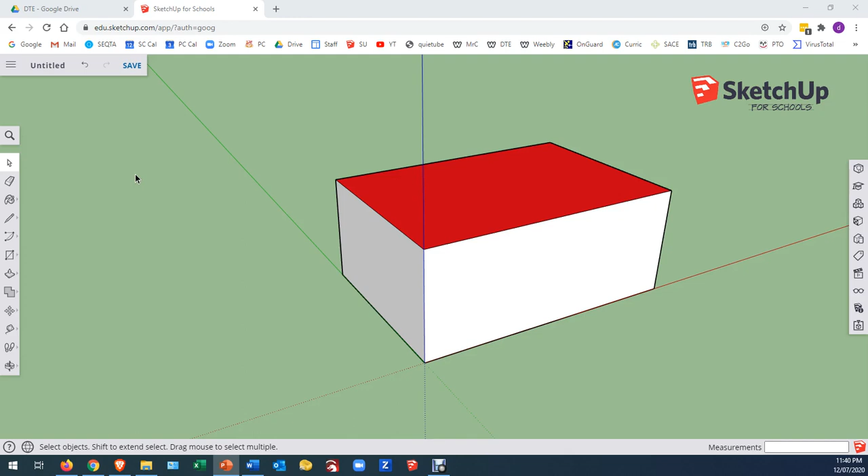Please pay attention because I'm going to ask you to pause and do this in a minute. We're going to come to the main menu, click on Home, create new, and create Simple Template Millimeters. I have an old model here, so it's going to ask if I want to save changes. I'm going to say no. Please pause your video and do those steps: main menu, Home, New, Simple Template Millimeters. Don't save your previous model. Please do that now.

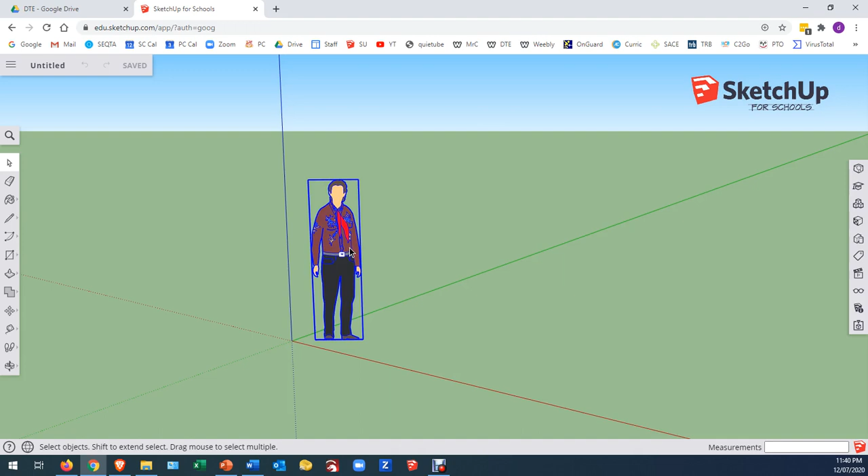Now we're going to get rid of this little person here. First we delete him. We don't need him, but he's actually in the model as a component, so we come to the Components menu. Nothing is visible here, but he's in the model itself, so we click on the house, and then click these three arrows to purge. That will clear your model of any components not actively on your workspace. Please pause this video: delete the object, Components, house, purge. Please pause and do that now.

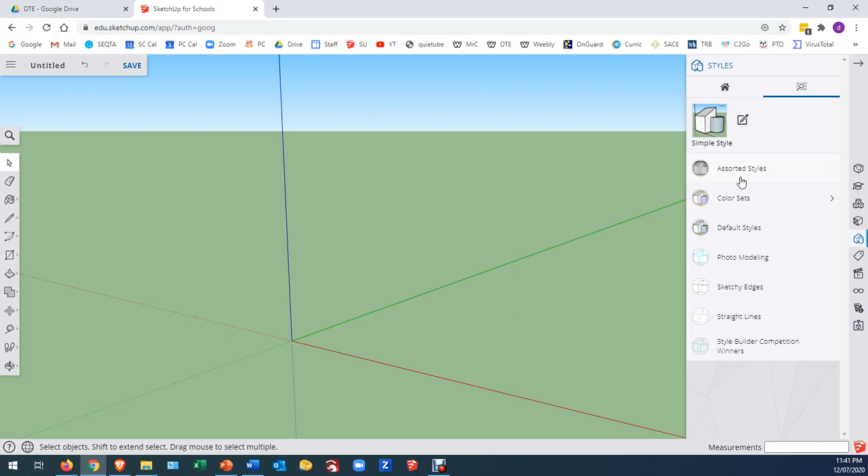Next we're going to set our environment. We have the green landscape and blue sky, and we want to get rid of that. We come over here to Styles, which are standard ways of setting the background, the colors we use, and everything else. We have this little arrow, or magnifying glass, for browse. That's fine. We're going to click here on Default Styles.

There are two styles useful to us. I use this one called Shaded, and that's what I suggest you click - it's very good for modeling. Sometimes, however, if I'm producing printed documents, the outline needs to be a little darker, or I need to separate my dimensions from the object, in which case I might select Construction Documentation style. That's up to you, just remember the option is there. Also, sometimes you'll want to see the inside of your shape - you'll come here and use X-ray - but right now we're going to select the Shaded style.

Please pause the video and do that again. Remember, from where we were, we came here and clicked on Styles. We didn't need to click anything here - we simply went to Default Styles and clicked on Shaded. Please pause the video and do that now.

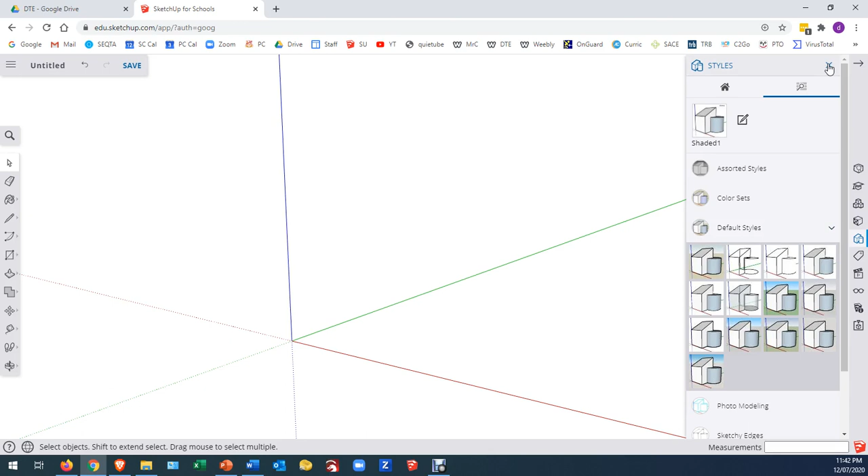We're going to skip over a step and come back. We come down here to Model Information and open up this panel. First, we need to set the length units - make sure it's on 0.0 millimeters. We need to be on millimeters, and we should be, since we started with that template in millimeters, so that should be fine.

The next one we need to click is precision - we click on 0, without any decimal places. Please make sure this tick is selected, and make sure the snap interval is 1 millimeter. So as a refresher: Model Information, 0.0 millimeters, 0, tick, 1 millimeter. Please pause the video and do that now.

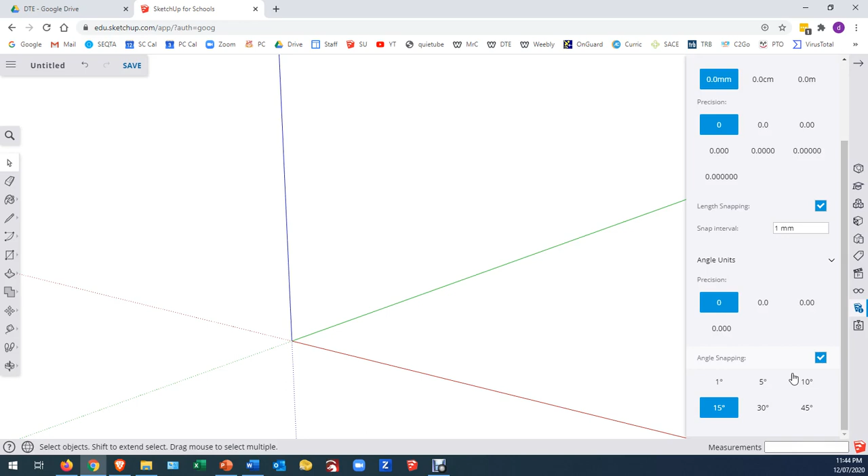Right, the next thing we're going to be looking at is the angle unit. So we're going to firstly click on this little arrow here, and we're going to scroll down. I've used my scroll wheel, but you can drag the bar this way. Once again, for precision, we do not need to show fractions of an angle, so we're going to click on 0. We're going to click the tick to say that we do want angle snapping, and 15 degrees is adequate.

Please pause the video once we've done this. So remember, show the angle units, 0, tick, 15 degrees. Please pause your video, go to your drawing, your model, and do that now.

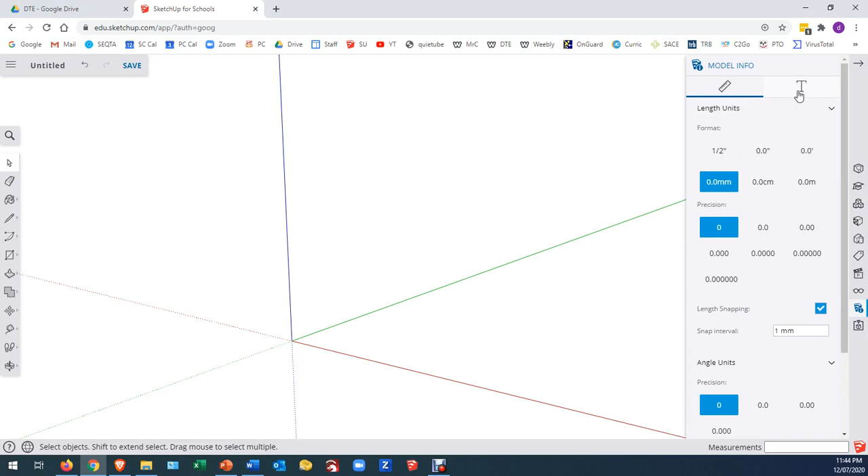Okay, from here we're going to scroll back up, and we're going to click on this letter T for text, and this allows us to set some styles for the dimensions that we're going to be putting on the drawing. I find that they need to stand out a little bit better, so the font of Open Sans is fine, but I'd like you to click on bold. I'd like you to make that 14, and the align to the dimensions is going to be fine.

This is on the screen, and that means that no matter which way you organize it, it's going to show up and be visible to you, so we're going to keep that selected. And I find that it's a little bit clearer if we click on this one here that says slash. We do not have any dimensions up here, so we do not need to click on the button that says update all dimensions, but if you were to make these changes when there were already dimensions on your drawing, you would go ahead and do that then.

But for now, let's repeat the instructions before you go do it. Click on the T, make that bold, 14, leave this as it is, click on slash. Please pause the video and go do that now.

Okay, I'm going to close that. Now what I'm going to do is I'm going to draw a little cube here. I'm going to do that by selecting my rectangle tool. So I'm clicking here, rectangle. I'm going to click once on the origin. I'm going to drag, I'm going to click. Now before I move, touch, do anything else, all I'm going to do is type 500, 500.

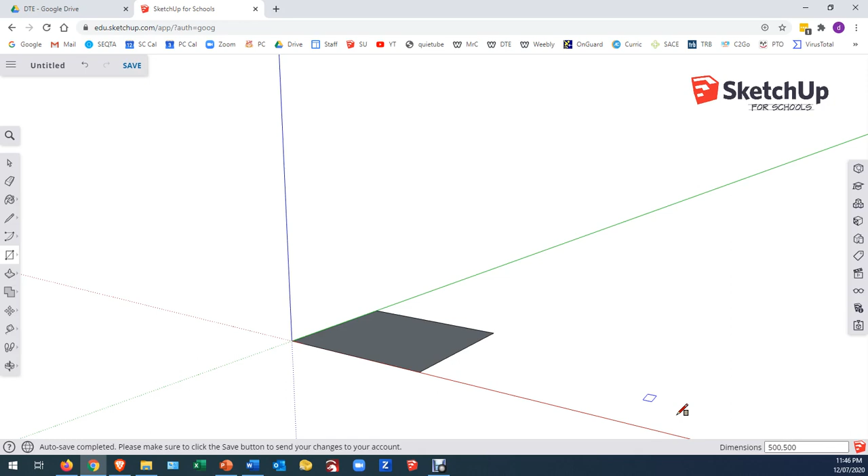You'll notice I did not move my cursor into the dimensions bar, but the dimensions are changing down the bottom here. So there they are. I haven't clicked, I haven't done anything. I've typed the numbers in. Now I'm going to press enter, and you'll see that it resizes that rectangle.

So a reminder, click here, click your rectangle tool, click once, click twice, type 500, 500 without moving the cursor. Do not click in that box. Hit enter, and you'll get a rectangle. Please pause the video and do that now.

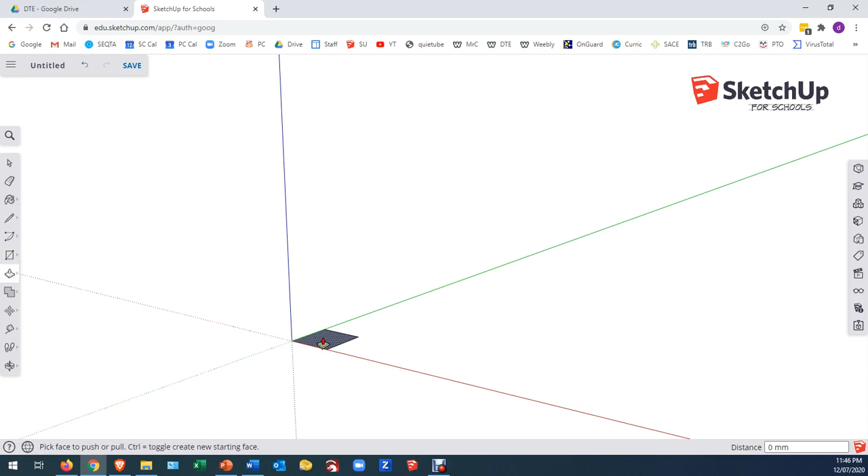Okay, the next thing that we're going to do is we're going to come back here to the push-pull tool. We're going to make sure we select push-pull. We're going to hover over that surface. We're going to pull up and let go. So we're going to drag it up. I'm now just going to type 500. I haven't moved my mouse. I haven't clicked into the measurements box or anything like that. I'm just going to click enter, and that creates a cube.

So reminder, push-pull, click and drag, release it, 500, enter. Please pause the video and do that now.

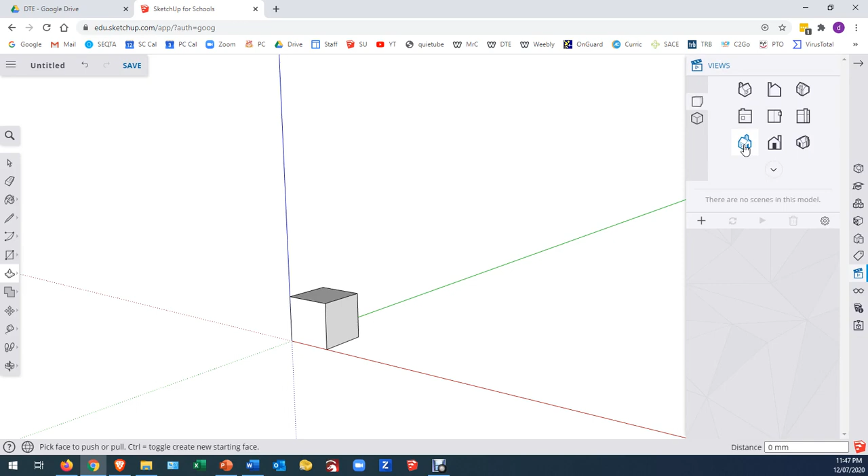Alright, so now what we're going to do is we're going to come back to this views menu here, and we're going to open this up, and I'm going to click on this one in the bottom left corner. That's going to give me my orientation the way I want it. But I can close the views menu off. You can see that this doesn't take up much space in my screen.

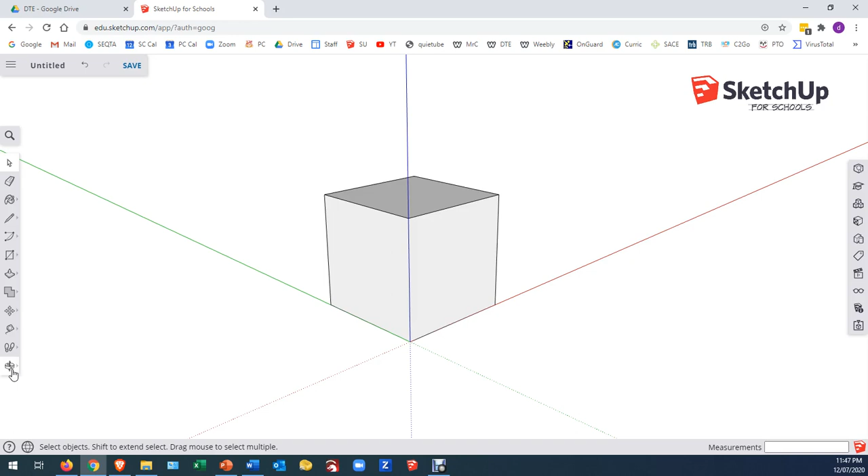I'm going to zoom it to where I'm comfortable, and this just means that when I draw something, and most of our items will be less than 500 millimeters, I will be able to see it. It won't be zoomed out tremendously. So I've just done this. I'm using my scroll wheel to zoom in, but otherwise what you're going to need to do is use your zoom button, or you can use zoom extents, but that's a little bit too close.

So you'll need to zoom and then zoom back out a little bit to something looking like that. So please, as a reminder of the steps, we're going to use the views window, views panel. We're going to click on this button here. Then we're going to zoom till it's actually a comfortable size on the screen. Please pause the video and do that now.

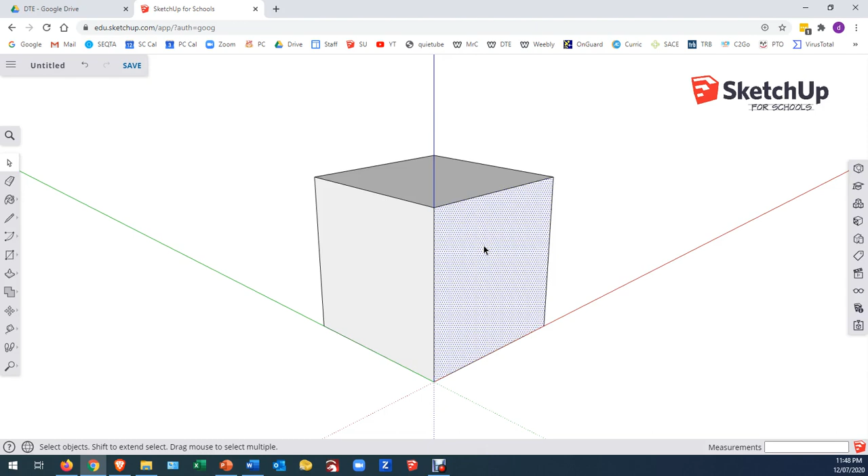Okay, we don't actually need this shape on our blank document, so I'm going to select the whole thing, which I've triple clicked. I'm going to hit my delete key so it goes away, and all that remains is to save it. Now, because this is untitled, I should be able to hit save and it'll ask me for a name. Otherwise, a better way of doing this and a habit to get into is to come to your main menu and click save as.

So we have untitled. I'm going to double click and type in blank. That is my name. I'm going to say OK. It's going to ask me where to put it. Now this goes back to Google Drive, and in the very first video we set up the Google Drive. So we're going to go firstly into the folder for 2020, or whatever year you happen to be doing this, in the folder for Design, Tech and Engineering, and then we're going to select but not double click to go into SketchUp.

So just to show you this again, to actually get into the folder, I have to double click, and I have to double click, and that moves me through the folder list. But I do not want to double click because I cannot select the folder to save. So I have to be here in this one, and I click once to select, and then it will allow me to select that, and it is saved. That means that blank.skp is sitting in the SketchUp folder under DTE under 2020 in your Google Drive.

And what we have now is a blank document. If we want to create a new document from here, what we saw before is we could go to new, which does this. I could go home, I could create a new from my simple template in millimeters. That way I know I'm in millimeters. When I hit new, I didn't know what I was in, and I'd have to go through all of these steps to get this setup that I've already got.